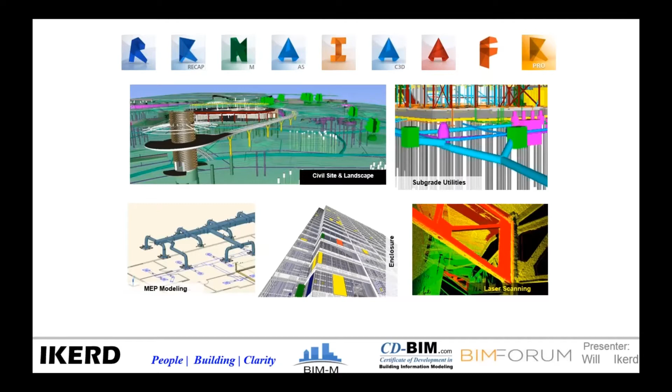So fast forward to today: I've been really blessed to be at a company where we work with a number of platforms, and we do shop and fab drawings for literally all aspects of the building. Probably about 20% of our business is doing reality capture with laser scanning. We use that in the structural systems we design.

How many of you have seen laser scanning on your projects? Some hands, okay. Who has never heard of laser scanning? Okay, some hands, no troubles there. If you've gone to a hardware store, you can get one of the distance measures and shoot a laser to get a measurement. You can walk a site with a clipboard and tape measure to measure things. These units now will shoot 1 million of those points a second in all directions, and you come back with a 3D capture of those surfaces.

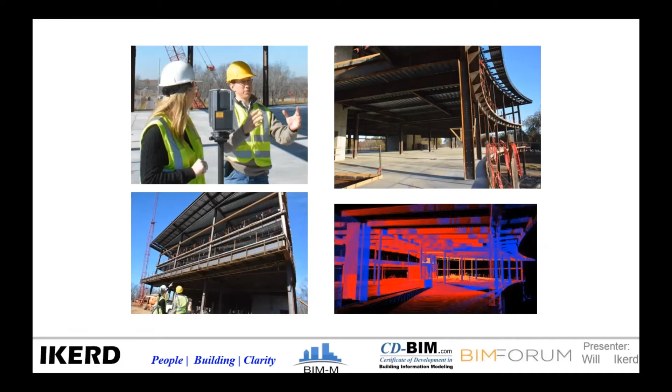Interesting trends, and where that's going. So what I want us to think about is: if I were to say a picture is worth... what would you say? 1,000 words, we already know this. And what's old is new. At the end of the day, there's nothing new under the sun, but keep that in mind: a picture's worth 1,000 words. If I were to tell you measure twice and cut once, you already know this presentation. You already know what building information modeling is about, and you understand why you need it in masonry.

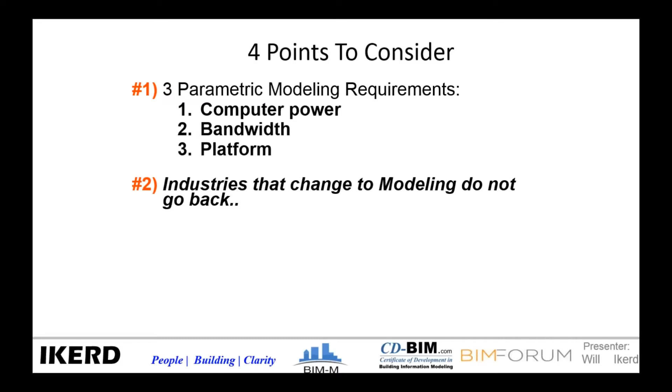So why is it happening now in masonry? In my graduate work, which I originally thought was a waste when I entered the industry around 20 years ago, I found there were three things required for an industry to go to 3D modeling: computer power, bandwidth to move data around, and common platforms that allowed them to transfer these models. I recognized this at the time I was in the St. Louis area, at McDonnell Douglas before Boeing acquired them. I saw in aerospace, and then what automotive was doing in other areas of manufacturing, that an industry that went to 3D parametric modeling never went back.

That change, when it does happen in our industry, will be unlike anything ever before. It will not be like going from paper drawing to AutoCAD with lines, arcs, and circles. This is 3D parametric modeling, and it's a very different paradigm than we've seen before. I'd submit it's probably one of the bigger changes we'll have in a 50 to 100 year span, and this adoption, when it happens, will happen much more rapidly than many recognize.

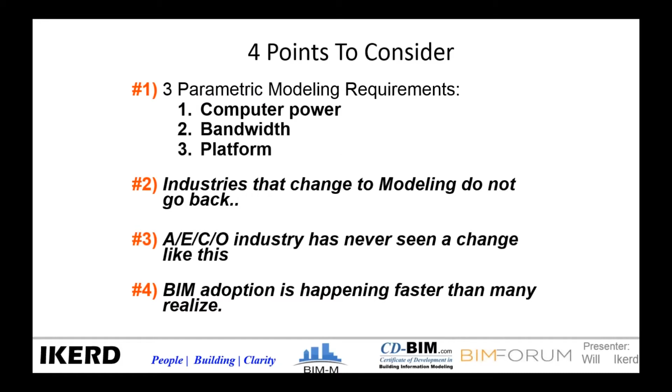What's going to drive it is that computer power can slip up on you. And if you're not paying attention, the technology will evolve around your industry, and your firm will be behind, or your industry or segment will be behind.

So how many have heard of the Cray supercomputer from '76? If I adjusted that for inflation, what do you think it would cost today? It had 8 megabytes of RAM in '76. More or less than $20 million? Do I have 21? It sold at $32 million in today's dollars—8 megabytes.

Many of you, your phones have much more capacity than this—we're in the gigs now. So if I thought about it, and this isn't a great way to compare it, but let's just look: it's about $4 million per megabyte back then. I've seen some 16 gig systems as low as $740 recently this year. You can frequently find high school students with gaming systems in the 32 to 64 gig range of RAM, but we're looking at 4 cents per megabyte. This gives you some feel: $4 million in '76, 4 pennies today. Things are evolving, and they're doing it very rapidly.

Bandwidth did the same. When I finished my graduate work, I was on a dial-up modem, and the whole idea that you could move a model around from one office to another meant you had to be a gigantic defense contractor with huge mainframes to even think about this. The fact that a single architect could work with a structural engineer working out of their house across the country, sharing models, was a very foreign concept. That carried on until we started to see DSL lines come on.

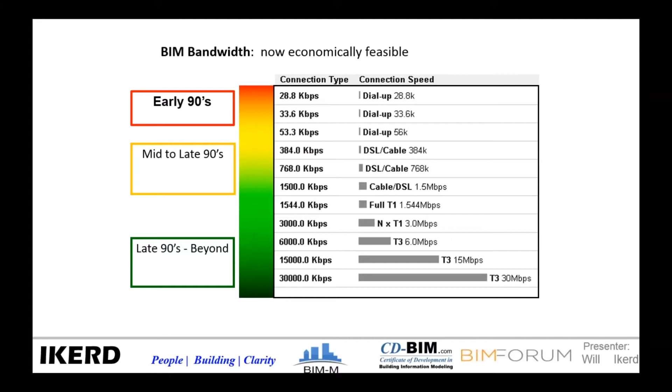But what you're seeing is in the building industry around 2000, we saw the evolution of those three things: bandwidth, computer power, and common platforms. Now there were limits—if you had a lot of detail, the models got relatively big in the 2000s. Then as I looked ahead and watched what was going on with wireless, you're seeing these same bandwidth speeds now go into mobile devices.

So the reason the title of this presentation is 'Masonry in the Fast World of BIM' is that we need to start thinking about this. What I focused my graduate studies on versus what is capable today is vastly different. And I started thinking that BIM is pretty much like dog years—but it's even more strong, it's more pronounced.

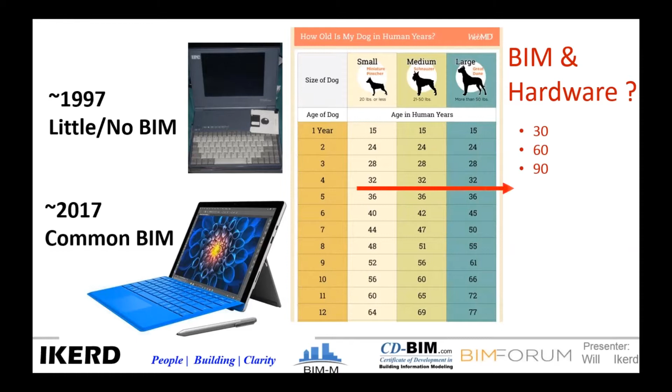This is from WebMD—they've got a metric that equates small dogs, medium dogs, large dogs to human years. But BIM has got to be the biggest dog, because I kind of feel like 1 year equals 30 human years, 2 years is 60, 3 years is 90, and 4 years, well, you're just dead. If your firm hasn't been keeping up with this and watching what's going on in masonry, you're going to be dead. If you come to this again in 3 years, it's going to be a very different BIM world, and your dog will be dead—you've got to just hang it up, either sell your firm or do something.

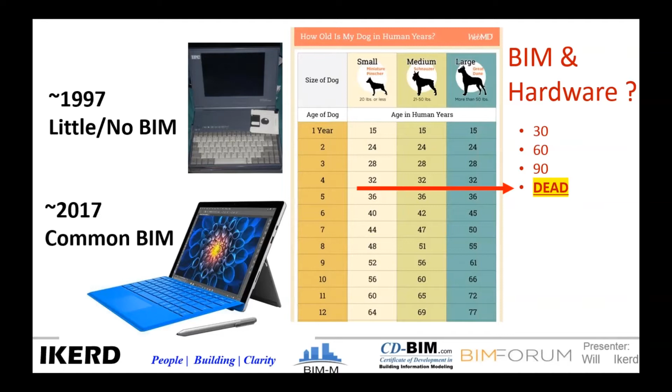This gets into it: things are moving fast, models are getting bigger, and we're adopting more computer power. We're able to share models with the cloud now—we've seen that in other presentations. And where does this leave us? I'd submit to you—who knows what one of the first delay claim cases was?

Was a masonry job with the Tower of Babel. Now, why did construction stop? Does anyone know? Their languages, they were confused. Now, whether this is a fable or a true story, I submit to you there's truth in this story. Construction stopped when their languages were confused.

And this is where the BIM Forum's level of development specification comes in. We have all these models flying around. Everyone's trying to come together and get this building put together in the virtual world. We need to be able to talk about a few things: scope, schedule, deliverables, responsibilities, and liabilities.

One part of my firm is working as an expert consultant on litigation cases in the BIM arena. And what I'm about to talk to you about in LOD is very fundamental in the contracts that are written well, and those that go into litigation. LOD, I'm finding, comes up a lot because it is the vocabulary that will start to create the common language for how the building will either go together or have a delay claim.

So if I went through it, the LOD specification with the BIM Forum has been progressing now since 2012. 2013 was the first publication of it. 2014, 15, 16, 17 is under development. Public draft will be coming out later this summer and be ratified at the November BIM Forum that I hope to see at least half of you at, in Dallas, November 6th through the 8th.

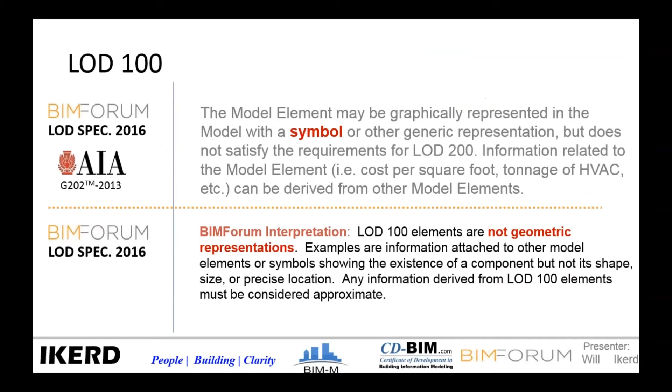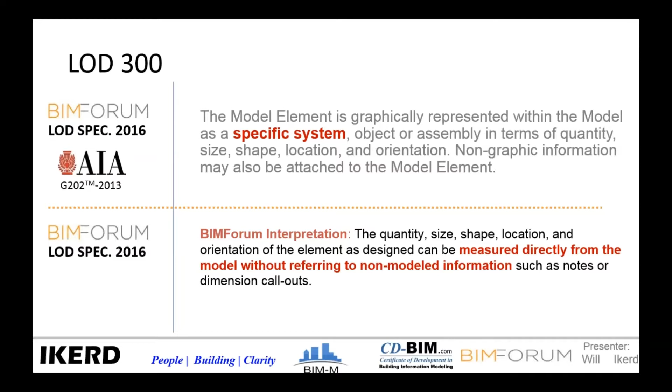Remember, 100 is symbolic for the element. 200, the element is approximate. 300, it is specific. And I'm going to show graphics of these here in a little bit, and I'm going fast because some of the earlier presenters have covered these definitions. I have decided to leave them in the slides, so if you get PDFs of these, you'll have them for reference. 350 is distinctive and unique to the BIM Forum's LOD specification.

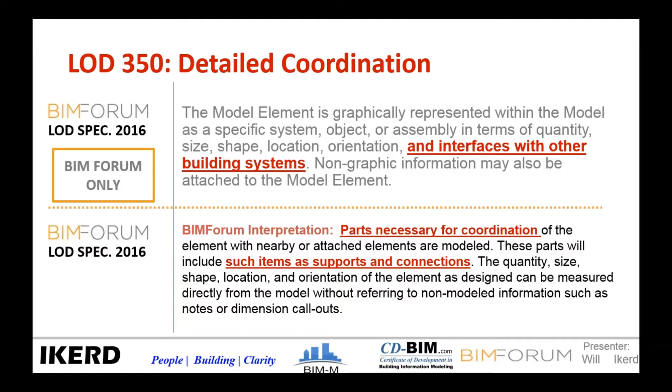It was ratified in 2013. I originally authored the proposal for it, and it really was birthed out of some of the early litigation work I had done. It seems like most of the lawsuits I was finding on elements were between 300 and 400. And I'm going to elaborate a little on 350. But 350, if you thought of it in a nutshell, is for cross-trade coordination. And the definition, the key phrase to think about is the interface with other systems. So we'll go into that a little further later.

LOD 400 is the detailing level. Jamie mentioned it earlier. I'm going to go through some examples very quickly. What I like about this specification, and this was one thing I advocated for, I wanted a picture on every page. I get tired of reading specs, and a picture is worth, and for so many of these topics of LOD, we use 1,000 words, when we have these very powerful models and we can start to communicate with graphics what we're trying to say that we want people to do in 3D models.

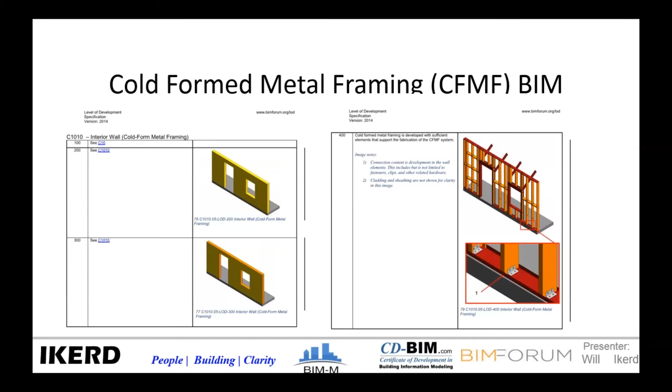It pains me when I see a 30-page BIM execution plan that spends 1,000 words defining something. So this would be cold form metal framing, and even Ray Charles could see these LODs—and that's even after he's dead. We wanted this specification not only to be easy to get right. We wanted this to be hard to mess up. We wanted the spec to be very easy to use, and then going the extra mile, very hard to mess up.

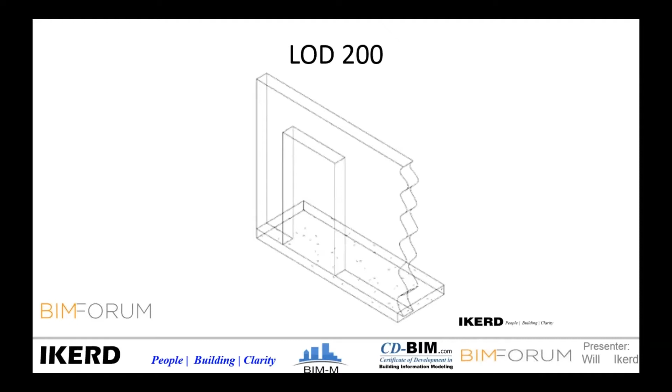So we added graphics. This is a wall. It's approximate—the thickness may or may not be correct, the location of openings may or may not be correct. At 300, I am saying that the thickness is the specified thickness. It's not a nominal 8-inch wall. It is entered correctly with the actual widths, and the rough openings are in the actual locations when that wall is at 300.

Some design models meet that criteria, some do not. If you don't want to meet that criteria in your architecture firm, exclude it from your base services. In your contract with your owner, exclude that from your base services or show it as an additional service.

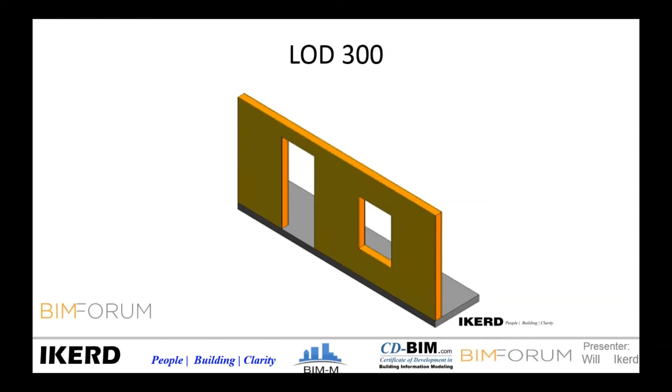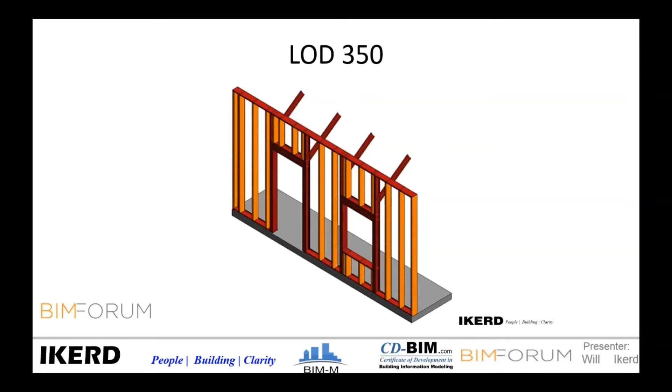This is a cold form metal framing wall. You see a lot on masonry veneer projects. At 350, you're starting to see the elements for coordination. At 400, you would see the clip angles, the fasteners. And these are images from the LOD specification.

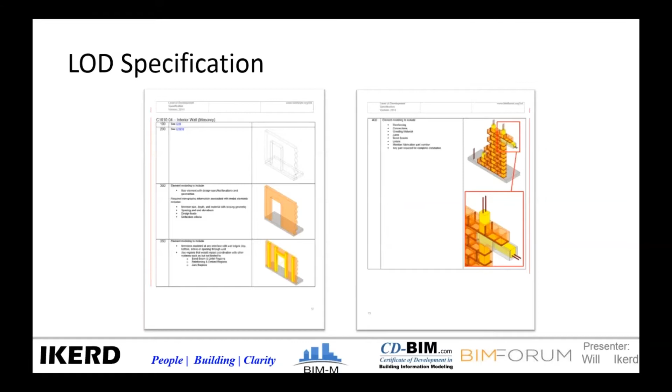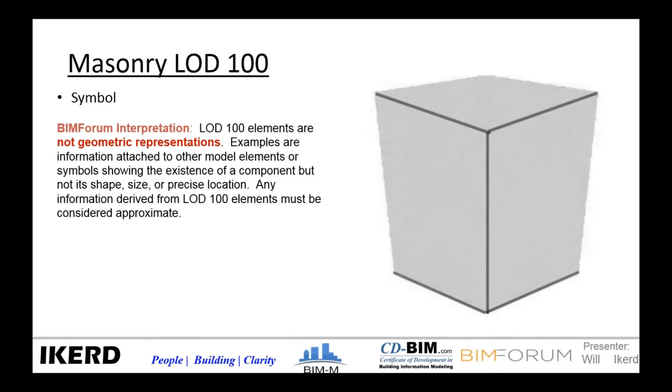Let's go into masonry—these were worked out a lot with Jamie and others with BIM-M. We look at 100. At 100, objects really don't exist yet. There is a mass model, and it's a non-geometric representation. So there could be a SketchUp model, and there would be a narrative that says walls in this 2-story mass will be load-bearing, and the rooms will be approximately of this size.

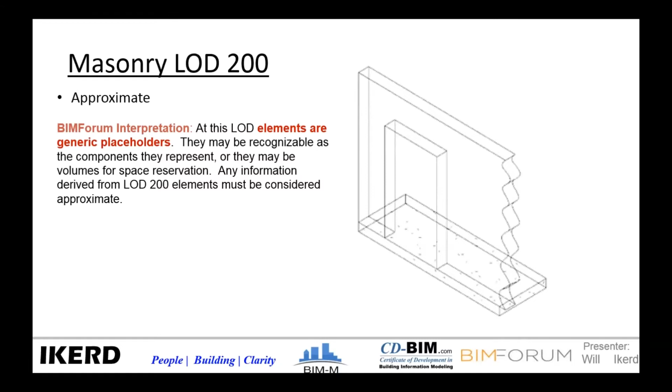Once you get to LOD 200 of the element, then it needs to be roughed out, but it's an approximate generic placeholder. At 300, though, those openings must be in the correct location. So some walls will be at LOD 300 and some won't.

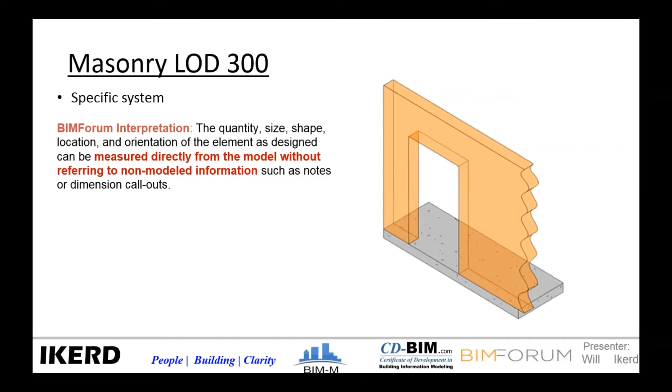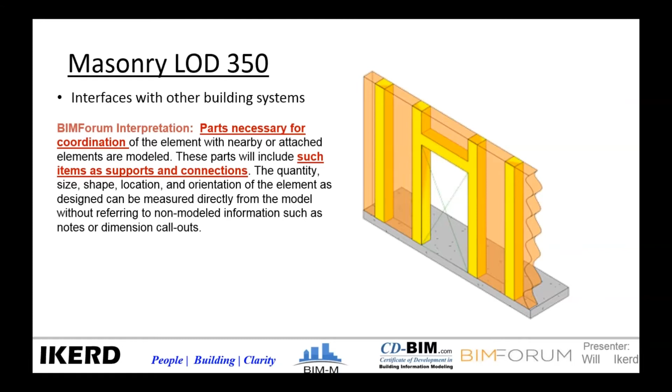At 350 for masonry, we're showing the grouting of the cells. Why would that be important? This is for coordination with ductwork—this was presented in one of the earlier presentations. LOD 400 is really getting into the detail, and on a lot of projects we would not model the entire building at this level, but for virtual mock-ups we would.

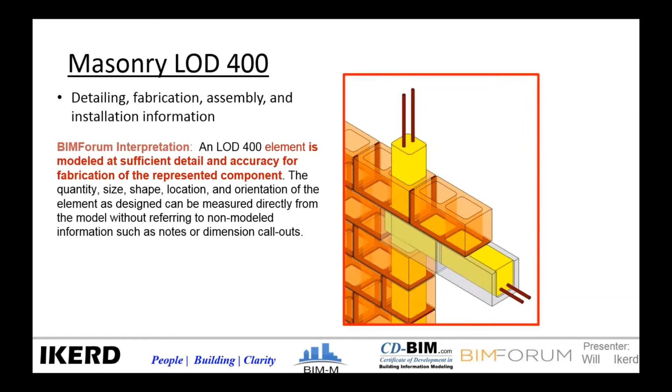So I'm going to talk about water intrusion and some of those issues. I want to recognize that one engineer on our team did a lot of work on these graphics, Eloisa Maya, and she also worked with Jamie on getting feedback on those graphics. She was not able to attend, but I wanted to recognize her efforts in that.

So we've got this tool—computer power is growing, we're getting bandwidth, and we're getting a common platform where we can start to show things. I just want to go through some of the things I see on projects, and again, these slides are included. I'm going to go through them quickly.

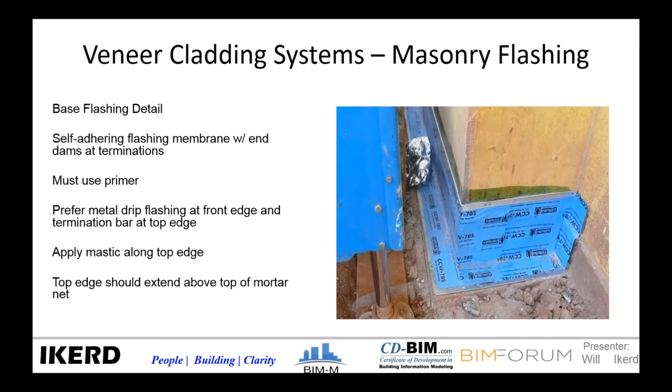I'm looking at masonry flashing details, trying to think of all the issues that go awry. What's one of the number one callbacks for a general contractor on a project? Water intrusion. It's also one of the number one litigation triggers. I'm looking at how end dams are working, at flashing details, and how they must be encapsulated. Sometimes I'm looking at when they're missing.

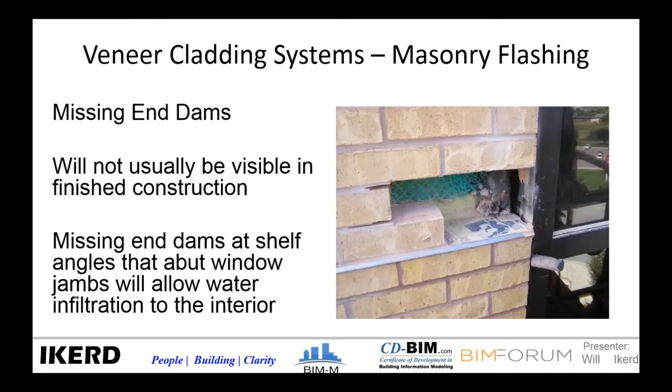Dealing with how we handle the returns—these are things we might have 2D details to show, but there's a better way. I'm looking behind one of the returned systems, looking at what it looks like there, and the model doesn't look that way. So we have to get to this dichotomy between reality and the model.

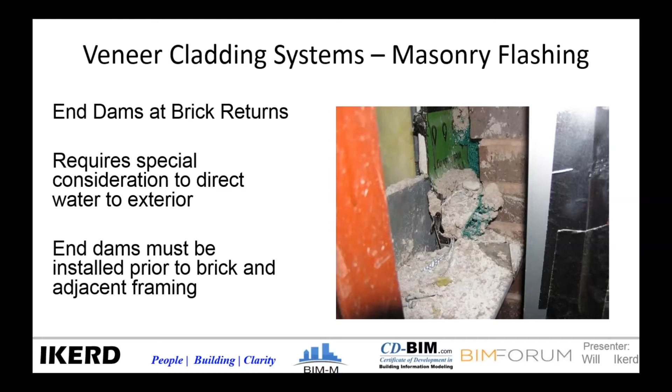This one's great—the image resolution, hopefully you can see it, and it's not too shiny, but you know, we've got the flashing. Let's go forward one. Let's see if I can do this. Does everyone see the flashing and these fasteners going straight through it?

Oh man, why in the world would someone do that? Well, it's because it was on the shop drawings—right there, going right through the flashing.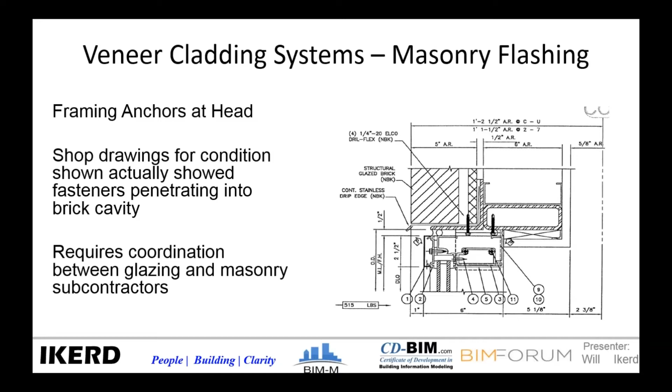So, you know, you can still copy stuff around in 2D details and move it around, but there is this benefit now: one, you can get a visual as you start to see these penetrations.

But I think the day is coming where we are going to start to do material checks—is a fastener clashing with a flashing membrane? And that day is not far away.

Why? Computer power is continuing to expand at a very rapid rate. So we think today the computers will bog down, but I want you all to open your minds and think—this is moving very fast.

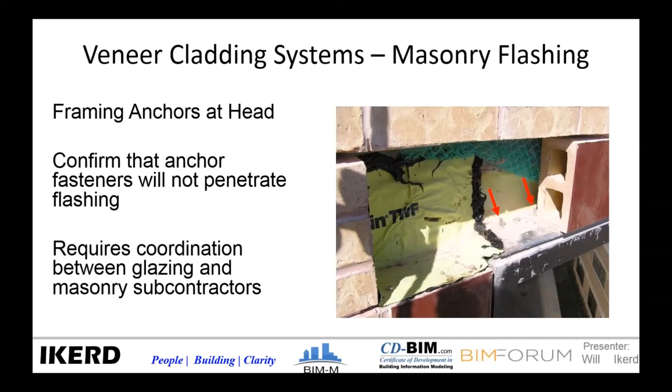But I would say there is value when you've got unusual geometries, because I do maintain that it is more economical to fix it with a mouse and a keyboard than a torch and a sledgehammer later.

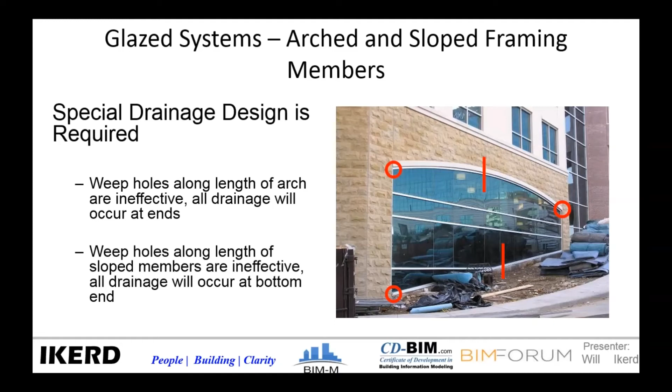And it's funny, when there are problems in the field, we always figure out a way to find time because we're concerned about getting into a lawsuit. There's this heat that comes on when we're trying to fix it during construction administration. Some of that will take designers standing up and communicating to owners about schedules, about realistic capabilities of them making decisions and giving feedback to the designers and design changes.

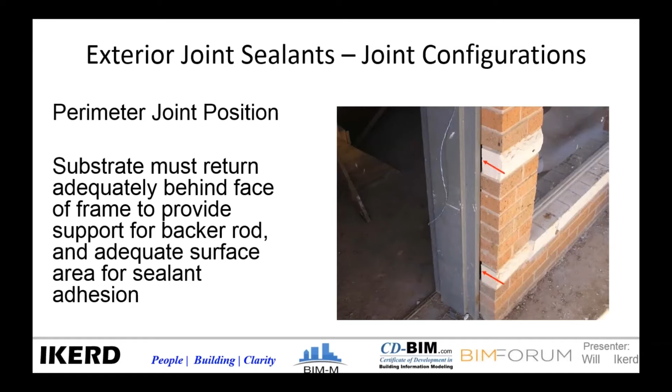There really isn't a soapbox here, and I won't be standing on one for a whole lot. But if I come over here, these are real photos from jobs that had been completed, almost. So you're starting to see where people have not thought through how all the systems are coming together.

This is an idea that checking is not going on. These are penetrations going straight into the building.

And so one would think on a lot of decent sized jobs, you've got physical mock-ups. How many of you have seen a physical mock-up fail on the first test? Yeah, and these are expensive.

And so many people will push back on what I'm about to talk about, which would be virtual mock-ups, which I think is right in the heart of where masonry is. They'll say, well, we still got to do a physical one. And what I point out to them is, of course, but maybe get it to pass the first time and think through it.

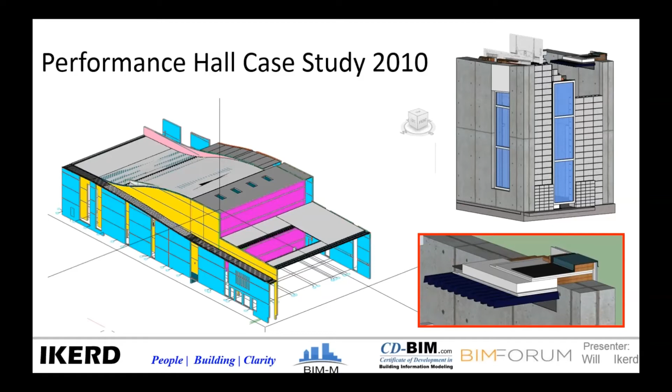Virtual mock-up was done, a cocktail of SketchUp and other things. Really with the masonry, we were looking at items such as working through the coursing and how that goes together. On this one, there was not a large volume of masonry—most of it was exposed concrete.

For the masonry, we did model all of the blocks. We did segment the models for the different faces, and it was slow and sluggish, but every block was developed.

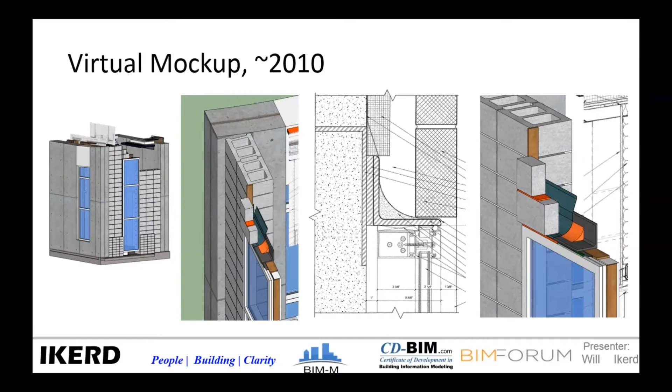This used steel curtain wall mullion systems, so you had spans going up from 60 to 70, almost 80 feet of unitized curtain wall system. Now the challenge you have is the architect originally wanted a half inch caulk joint, and if you look at your concrete tolerances going over 60 to 80 feet, you could have some issues. It did get expanded to three quarters.

But one of the challenges you've got in this is tolerances. And the reason I point that out is all of these models are incredibly precise, but that doesn't mean they're necessarily accurate. LOD means that yes, they're always precise. LOD means when I'm at 300, you can measure from that object and it is within its location. I don't need to reference any drawings. I can measure in the model and I know its location. But the LOD spec does not address tolerance.

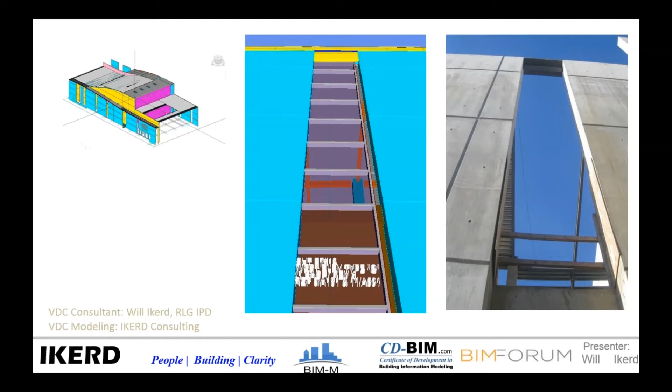Tolerance is left to each industry's materials. When you start to look at things like curtain wall and how they fit around masonry, you can get large thermal expansions. There's live load deflections on the floors. You can start to compound things, and that's where we need to start looking at tolerances.

And this is where laser scanning comes in. This, in 2010, was one of the first laser scans we used with enclosure systems, coordinating masonry. And this technology has grown substantially. It's faster, it is more economical, the computer power to process it, and the turnaround times are quicker.

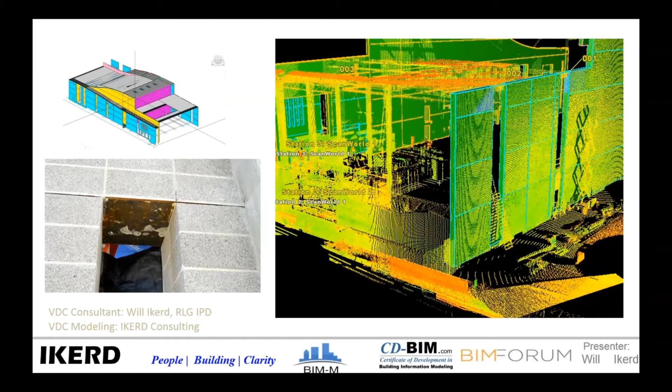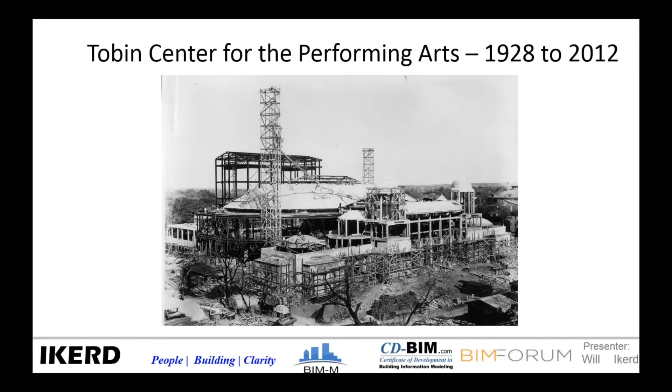Moving forward to 2012, this is Tobin Center. On this, one of the things was documenting the stonework and masonry work on the project. This was a 1928 structure, and it was exposed. They're adding a $135 million addition to the center of it. So my team went in and we scanned it.

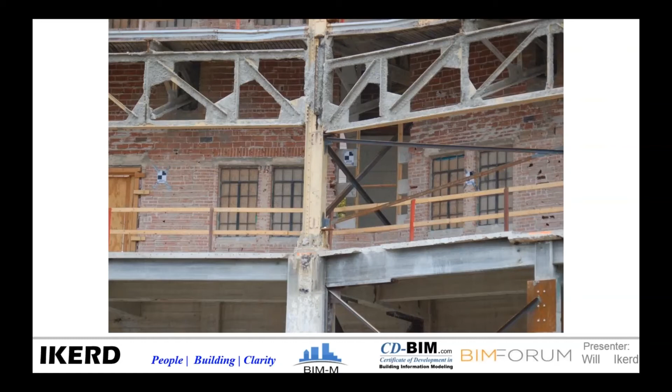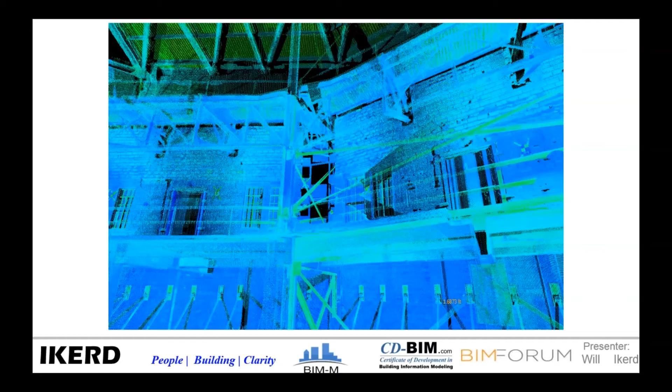So built-up plate girders and all original masonry work, but this is the laser scan. I could tell you where every grout joint is. I can tell you every aspect of the rough openings, and I can go back and measure those. If there's any measurement I forgot to take while I was out there, I simply open the model and go measure it. These are millions of points. Nothing is really modeled here. This is a point cloud of millions of points, and then later we can go and work on it.

This is a medical office building. This is a current project that's underway right now. This would be LOD 350 modeling. You'll notice this one happens to be with Revit. So you can see how it's applying that wallpaper even on the top, which is kind of silly. It doesn't even match its own image on the side.

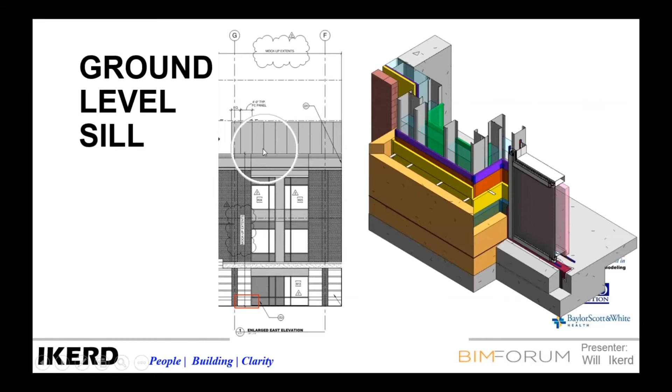Ignore the hatch patterns. But what is going on here, and you would start to see as this gets developed, we're not doing a mock-up of the entire building. We are focusing on where they're going to build a physical mock-up. They're going to build a physical mock-up of curtain wall and masonry of this one whole bay all the way up the building, and that'll be what they test in the field.

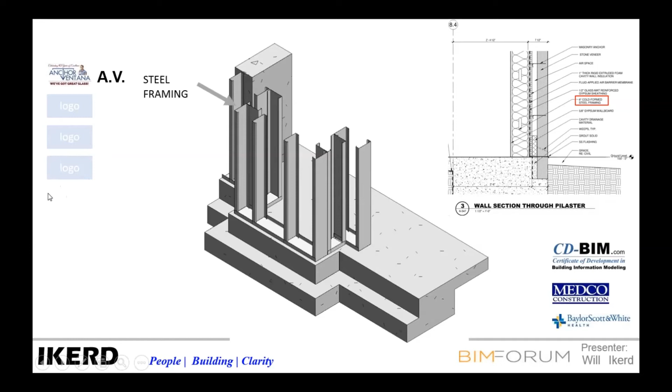What we are doing with this is these images go in. Our engineer has put in sections from the design team's drawing. These are being worked out under the general contractor, which is Medco. These logos will be for each of the trades, and what we're going to do is actually label who installs what product and their specified material.

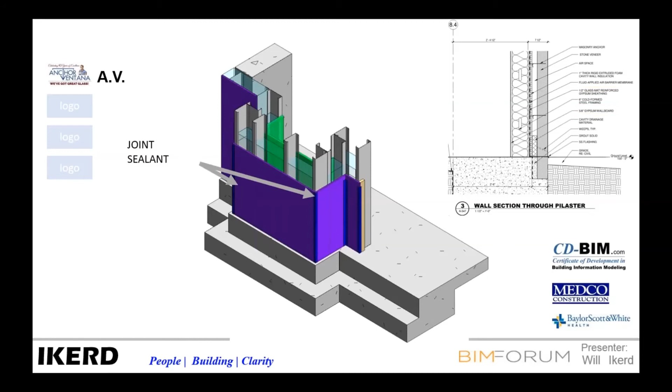And we would start to look and step through it. So this would be LOD 350 to 400 of the elements. And you would start to see the sealant joints, and we should start dealing with peeling it back and stepping through the installation sequence, talking about where the fluid-applied air barrier and membranes will overlap.

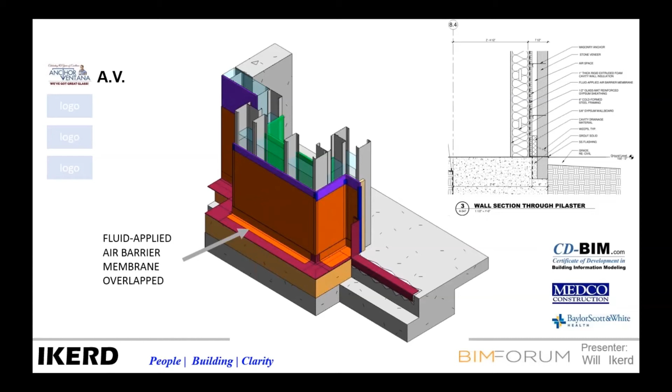One of the things we're going to be doing with this is, in parentheses of each of these steps, we will be calling out which trade installs it. And the goal of this is at the building enclosure review meeting, there are no excuses. It is painfully obvious to the most casual observer how this enclosure system comes together.

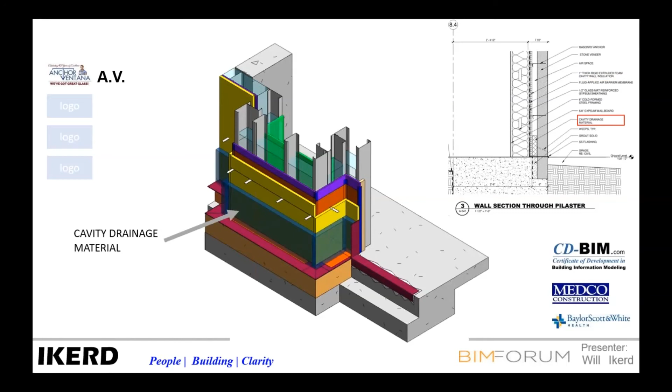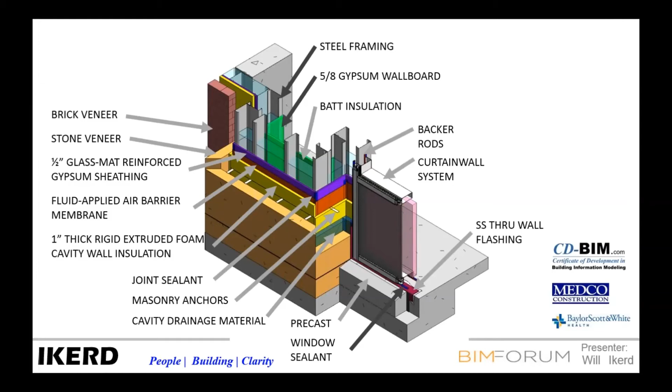But this would be a good example, in my opinion, of going to LOD 350 to 400 on this. We would start to show where the systems would start to feed in and how the brick veneer applies in, stone veneer, etc. Not a lot of time compared to the liability you have if there are breaches or troubles in the system, and also you're not doing this over the entire model.

Moving forward, this is the Mobile Courthouse. Yates is the general contractor. Tom, you did some of the glazed block on this project. We had the pleasure of collaborating with you on that.

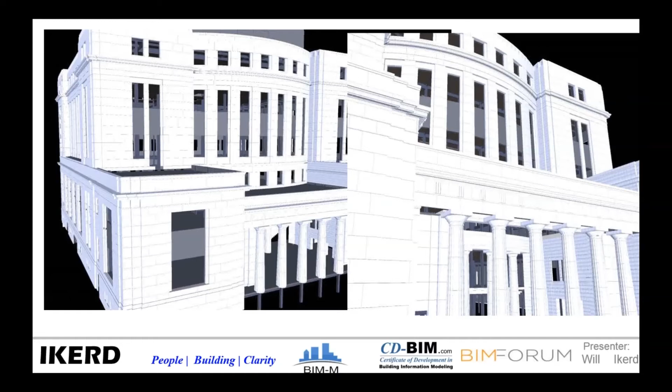Our company is doing all of the stone from the shop drawings, and this would be 350 to 400. Every stone is modeled individually, distinct to its size, with its clearances. As you go through the entries, what you have in the background here, this is a progressive collapse design blast-resistant structure. It has precast panel along the perimeter, steel structure on the interior, and then clad in stone.

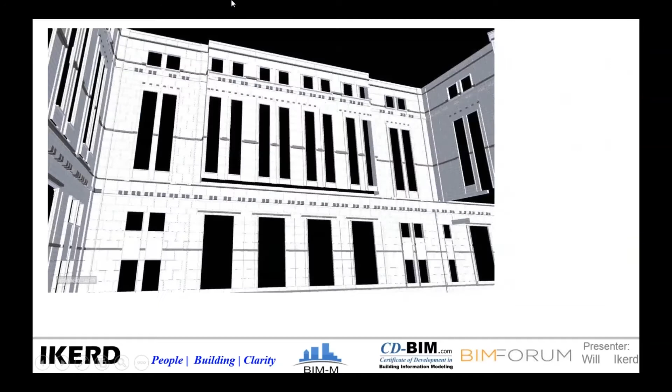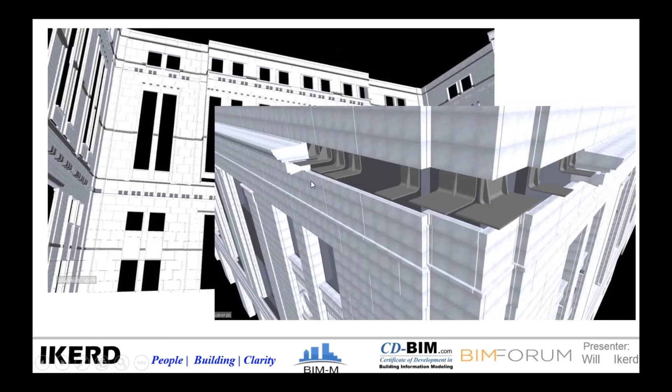So what you'll see here is a number of the connection fittings, and part of our task is modeling each of these shelf angles, but they needed to be intermittent to work out with the precast concrete. There were changes during the design.

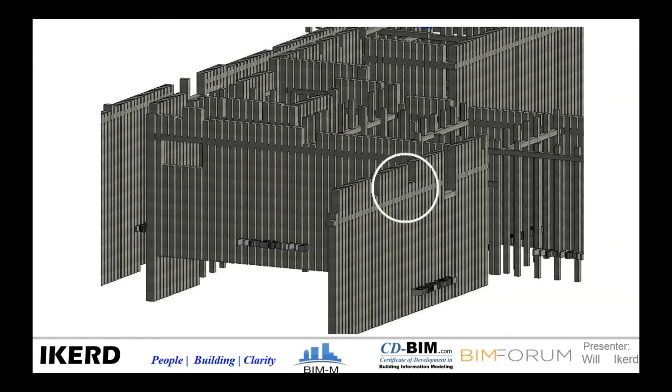This is on the interior as a separate task. We did handle the CMU, and this is just the extracted grout model. These are detention areas in the basement, so all cells are grouted. So what you're looking at, you don't see the block. This would be LOD 350 on the walls for coordination with ductwork, and this is where the structural steel floor beams would be coming down, and probably ductwork there.

Moving back to the exterior, large model, but I will say I think a number of our machines have been upgraded to accommodate laser scan data, which are large point cloud sets. And this is on a decent desktop, but this is kind of in the $2,000 range.

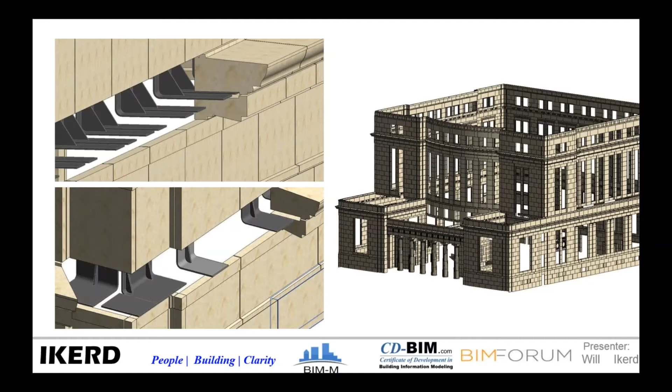But remember, a BIM year - 1 year of a human life is 30 years in the BIM world. So you need to be thinking, you need to upgrade your machines every 2 years. Be thinking about that. Because 2 years in, they're basically ready for retirement, 65 and a half.

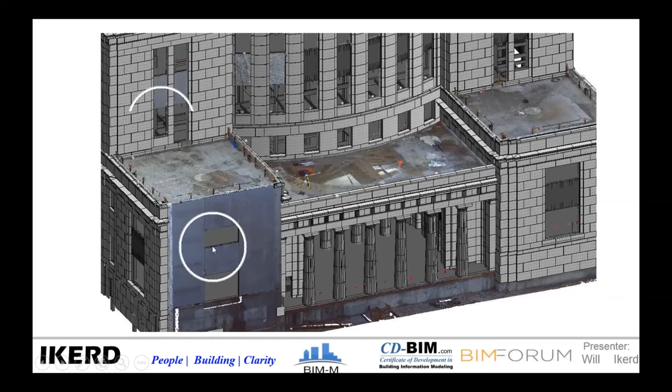Here's the exterior going in. What we then took with this is brought in laser scanning of the precast concrete system. So what you're seeing here, they have not gotten the stonework this far along. This is the laser scan of the precast underlaid with the stone model going around it. And one of the things we're working out, there was coordination error issues between openings between precast shops and the stonework that got validated in this process. And then the laser scan is helping validate the tolerances for the systems.

So as I go with this, I'm looking here at my time. I won't have time for questions, but there's a few takeaways.

BIM is, I flipped that, it's 10% technology, 90% sociology. And people are the biggest challenge, and they are the greatest solution.

But the takeaway here is that it takes a lot of training. If I had to point to what's holding teams back today from when I did my graduate work now 20 years ago - 20 years ago, very few people wanted to do it in the building industry, and we didn't have computer power, we didn't have bandwidth, we didn't have common platforms. I would say around 2005, I started to see these things coming into place, and now in 2017, what I believe is holding us back is training.

I believe for most firms, if you're a one-person shop, you can afford to buy a computer that can do this. You can afford to have the software, arguably, to do this. And you have the internet connections. If you have kids in high school that do video games, you probably already have the computer and the internet connection to do this. But what's holding us back now is training.

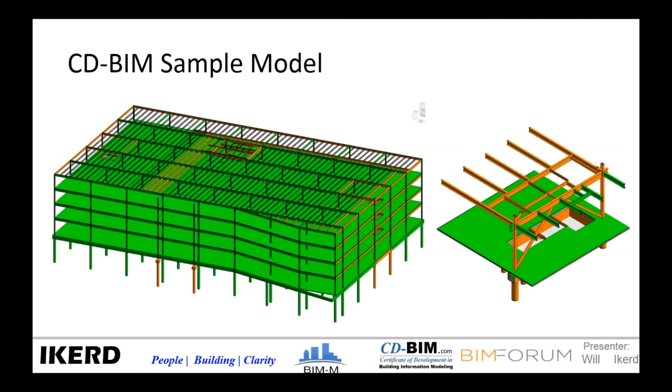What NISD and the Certificate of Development curriculum want to do is add in modules. Currently they're working on steel. They're adding in concrete. They want to add a masonry module. We look forward to collaborating with BIM-M on that.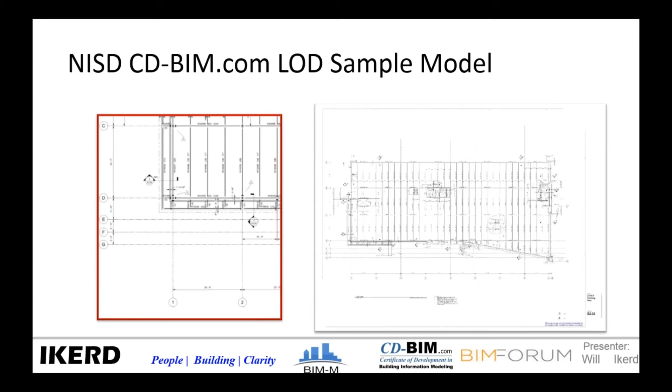So how you inspect a building will start to evolve. I've seen some people doing pilot work with thermal imaging, looking at masonry walls, seeing which cells are grouted and ungrouted from thermal, and overlaying that color map to the laser scan data. So you have both the geometric representation of where all the joints are and the heat map across the wall.

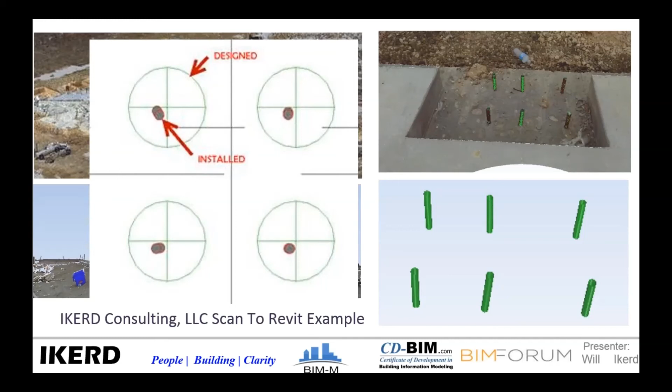So again, these are just going on from there. David had asked me to go a little fast. I think we have time for some questions. Y'all have been very gracious, and I appreciate your time.